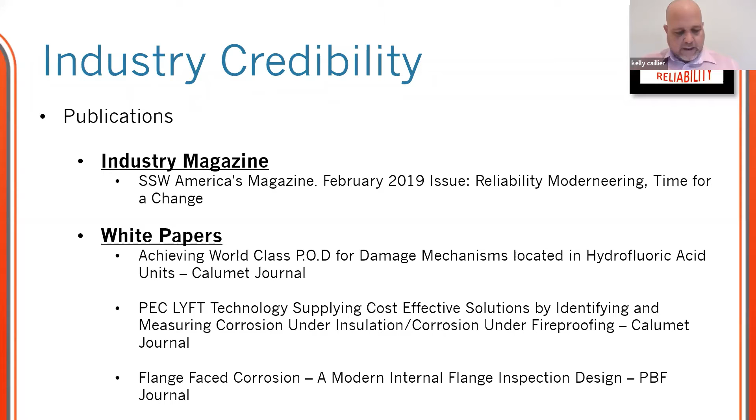So I'm not going to stay on this. This is my 26th year in this field, in 5 countries, highly certified. I'm not going to stay on that. I have been published in magazines, white papers throughout the country. So I just want to kind of throw it out there, because you might think, who is this guy to speak on this topic? So I've been around a little while.

Jared knows this story. Kayla knows this story, but I want to share with everyone. This is kind of the why of what I designed and what I'm going to show you. In 2011, something happened in a refinery in South Texas. There was a guy that I got very, very close to, we would meet at the coffee pot every day after our safety meeting. He loved baseball. I love baseball. He had a 5-year-old son that was just getting into t-ball, and he was their coach. And he was so excited that day to share with me these practice plans that he had come up with for his t-ball team, 5-year-olds.

And I said, man, you understand that, look, you're going to probably have your son and maybe one other person that's going to be really good. And you're going to have to stop people from picking flowers. So your practice plans, I said, man, tell me how that goes tomorrow. And we laughed, and he went in the plant and I went in the plant. And about an hour later, I heard a boom. It sounded like a shotgun, and I said, we're in South Texas, maybe it's just part of the atmosphere.

And when we were leaving that afternoon, we found out that my friend never made it to coach his t-ball team, and his son and his wife lost a husband that day. And the root cause of the accident ended up being a chemical injection point, which is a high consequence, high probability of failure item inside of a refinery.

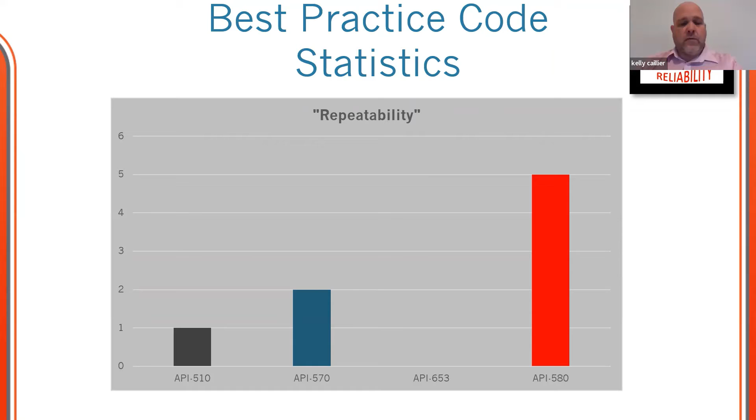So when we have codes dictating - and I'm not against the codes, I'm just for improvement in the codes. I'm certified to all these codes, and there's an improvement opportunity in these codes to say, hey, let's start to document and measure repeatability just a little bit better. I wanted to show this, these are the codes that are dictating, regulating our industry. Quite astounding, actually, when I scrubbed these codes and found not many instances of talk about repeatability.

So after studying - and the European Commission is saying the same thing - after studying with Lloyd's and the Chemical Safety Board and all these other teams, the lack of understanding damage mechanisms, how failure modes, I guess we can call it - whatever kind of industry, there's ways that things fail. How do you inspect for those? How do you mitigate those? You first have to understand how they fail. In this industry at least, the lack of understanding how things failed, and the lack of understanding how to actually mitigate them, was the major contributor to most of the most catastrophic failures ever seen in this world.

The lack of what I call a concurrent engineering process, where this guy here and this lady here knew what was happening, they were actually communicating, and everybody in this circle were able to exchange information. They had knowledge exchange campaigns in place. When a damage mechanism was manifesting outside of its integrity operating window, the whole group knew what was going on. Communication is a big problem in our industry, and when something happens, it's never communicated. That was a root cause of some of these catastrophic failures, and the neglect of a repeatability, much less reproducibility program in place, is just front and center.

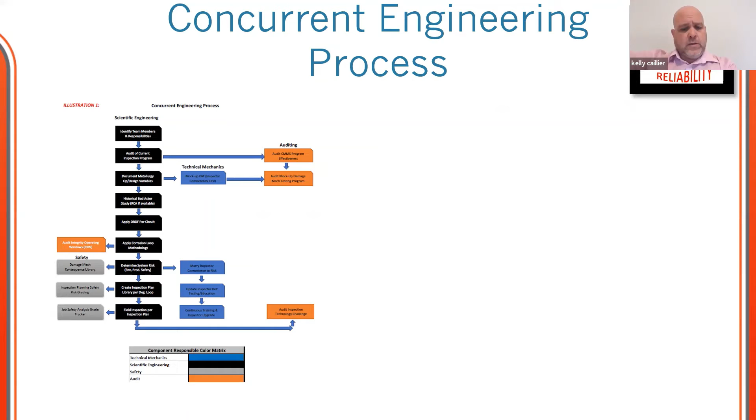And then there's an audit system, because this whole piece is an audit system. And there's a lot of responsibility when it comes to auditing something. We're trying to provide a closed loop, auditable, measurable system that allows for reliability growth. It really all starts with the quality piece, and you'll see elements that contribute to the quality, and elements that we need to measure for reliability as well.

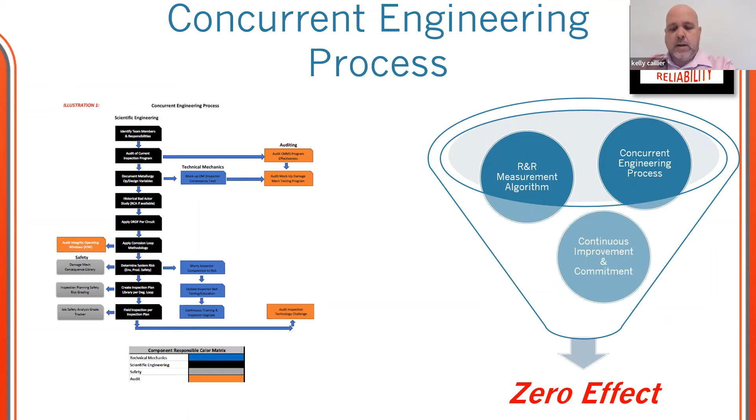And then what we're trying to do is eliminate - it's a strong word because it's very difficult, because there are so many factors that come into play - but due to mechanical integrity, which are factors that we can control, we're going to eliminate medium to high risk failures. And we'll know about them before they actually fail. We're doing a pretty good job of that now.

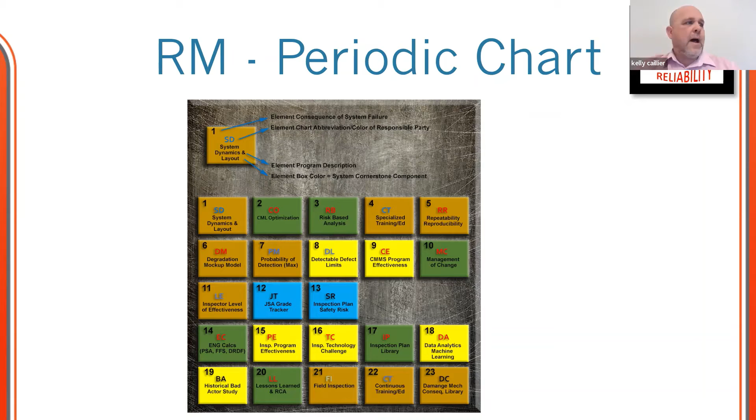So here's the periodic chart. There's a whole fabric built into a software program for this, that has a whole audit system on the backside. And the system is built to programmatically find the actual element that affects the highest change that can be made at a certain period of time.

So if CML optimization number 2 is the highest contributor to raising the level of effectiveness in your program, in your facility, in your site, in your objective, it's going to programmatically shoot that out. And then what happens is there are many other elements that are actually part of it. So CML optimization can actually have an effect on 5 different elements, raising the level of effectiveness in 5 other elements, therefore raising your overall effectiveness.

By concentrating on one element, your overall effectiveness can go up 10 to 15%. So what happens a lot of times - and I was just talking to a guy from Exxon here recently - is that whenever we pay attention to certain elements, like in your periodic chart, other elements don't get the deserved attention, and then those start to fall out. So we measure that too, and we want to make sure that the progress we've made keeps moving forward.

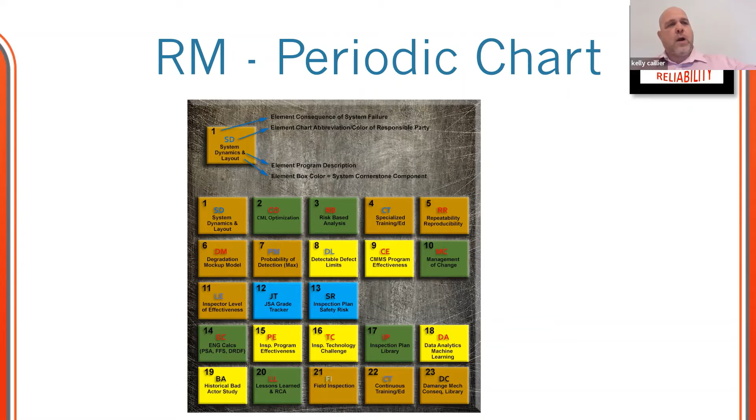So you can see element 5.

One thing I want to show you is that the periodic chart within the software program is weighted due to system risk. Everything on the top layer of the periodic chart has 100% weight. Any of these elements are critical to overall success of the reliability monitoring system. And as you move down, it's 80% system rank, 60% system rank, and then 20% system rank.

What's funny is field inspection is way down, weighted at 20%. People are like, well, field inspection is so important, why would it be at the bottom of your periodic chart? Everything on this chart is important, every single bit of it. But for field inspection to be a contributor to overall improvement and for us to make proper predictions for future equipment, a lot of things have to happen at a high level before field inspection can even be a contributor to that. That's what we've built here.

So the whole measurement system comes out, and I'll show you in the lessons learned, we were very hard-headed. There are some lessons learned at the end where I really, and our team really, needed to listen to our clients. We had this static fabric built software with these elements, gauges throughout, measuring how effective you are, but we built this fabric to just be static. We thought, this is the way we see it, and this is the way everybody needs to see it, and they need to conform to us. Well, quickly you find out that that's wrong.

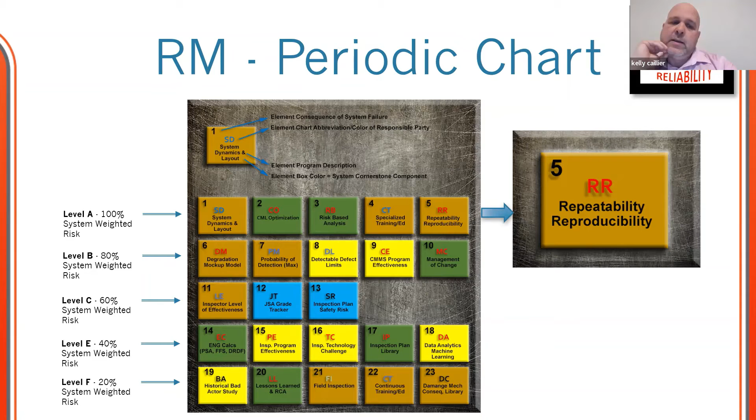What we've allowed is the system weight, this top line needs to be there, and everybody we've talked to so far agrees with us. What happens between element 6 and 23 sometimes can be scrambled around depending on what the client's trying to accomplish, their maturity and their mechanical integrity campaign and journey. So they're allowed to actually move these elements around, and then it recalculates how it affects the entire program. That's something new we're working on right now. It's in development. It's something I kind of saw coming, but I didn't think was going to be a thing, and I needed to probably listen to myself and other people, and I didn't, but I learned.

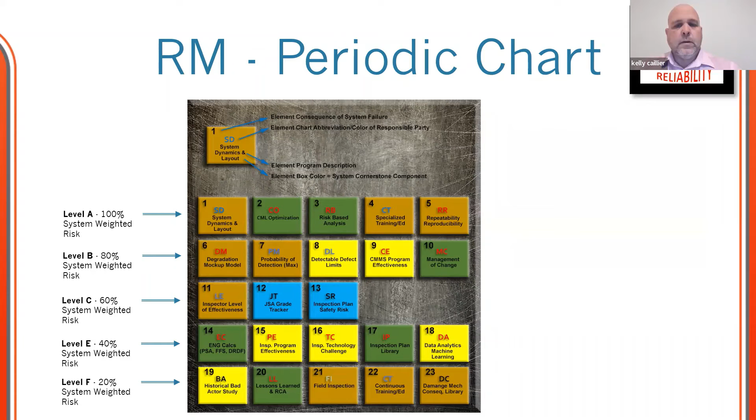I'm going to get through this. I want to show you back in the proof of concept stage, a couple years ago to about a year ago. There were 3 refineries that we studied. The first one, you can kind of see the table. This is raw data of the process effectiveness, and you'll see element number 1, system dynamics and layout. This refinery was 83% effective, and so on and so forth. You can start to really see how this program laid out here.

Before, as I was dealing with this refinery, and there's a caveat to this, I want to make sure you know this refinery no longer exists. And it no longer exists not because they shut down, it's because they had to. In this very unit that we studied, this hydrofluoric acid unit...

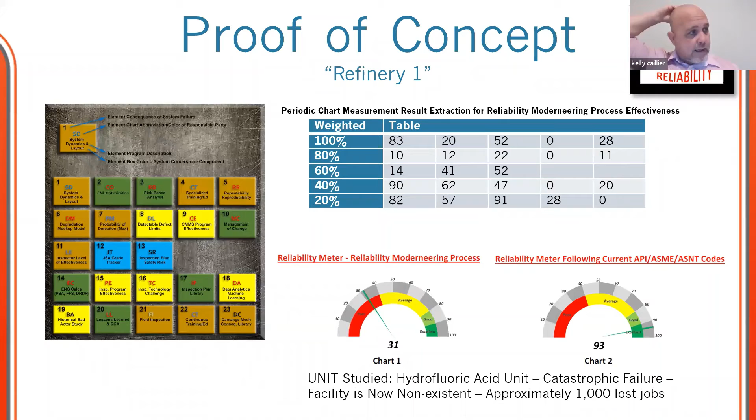Just a brief understanding of hydrofluoric acid: when it fails, it makes a vapor cloud. There were explosions everywhere, and it took over a little small city. It's about a 10 to 15 mile vapor cloud that comes out. This refinery no longer exists. But I did this study before it happened, probably about 6 months before this thing happened.

Long story short, I only had this table here, this 31% table. I didn't have this table here. This is another lesson learned I wanted to share, just because I was hard-headed again. So I went in there and we did a study, and it was 31% effective. And that's what I came out to.

The guy said, man, thank you so much for spending time with us, we really enjoyed what we learned from this study, and we'll get back in touch with you. Well, they didn't get back in touch with me. Then there was an explosion, and the guy ended up speaking to me, and he said, hey, look, I just wanted to tell you what you designed was brilliant.

But if you honestly thought I was going to bring 31% effective to my boss, you lost your mind. And he said, I don't know what you need to do, but you need to do something that can contribute to us actually installing this kind of program, because it's needed, but it can't make the client wrong.

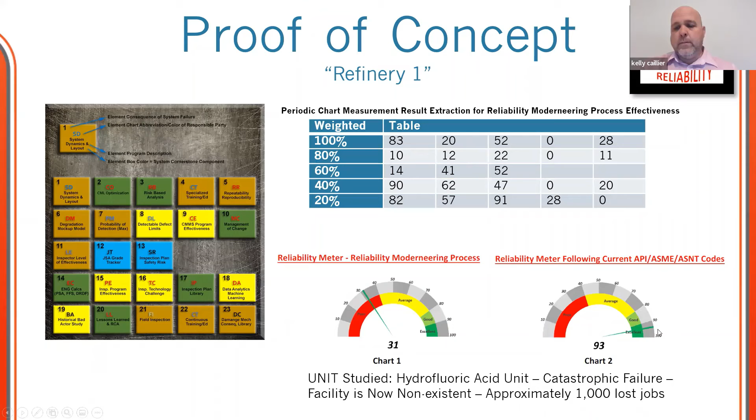And so I thought about it, and what ended up happening, because of the data that we had collected, we built a chart, or measurement system, that said, okay, those codes I showed you at the beginning of the presentation, how well are they following the minimal standards of the jurisdictional codes? How well are they doing that?

And so we started to study that, and it's like, man, they're doing really, really good at following those codes. But there's opportunity, obviously, for these things to be measured differently. Because we're not just talking about inspection now, we're talking about communication, quality, all the way to reliability, training, understanding, and everything that's involved in running a plant and keeping a plant actually up and running and not failing.

So we found out quickly, 93%, they were effective. They were just about as excellent as you can be following jurisdictional codes and the minimum standards set in there. And so I called him back and we talked about it. And he said, if you had come with that, we wouldn't have eliminated that failure. Those failure modes were too far gone.

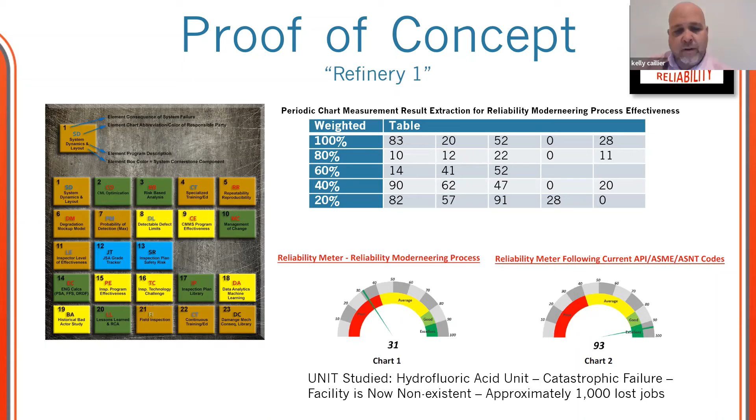But this is something for the future that you might want to think about, to be a partner with the client and not making them wrong and you right. So I learned that. You have to be humble a little bit.

Refinery number 2, kind of the same. This one, only one unit was studied. It was an FCC unit that previously had 12 days of unplanned downtime in the previous 6 months. Business interruption alone was 18 million. It was a pressure vessel failure, and it was due to mechanical integrity. Very catchable, could have eliminated it, could have brought it down before the failure, but didn't.

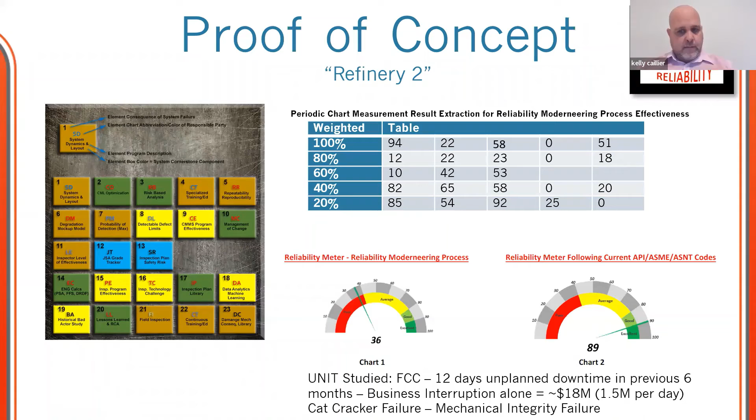And you can see again, 89% effective following the jurisdictional codes and the minimum standards, 36% effective. And this is only one small unit. This is not the rest of the units in a very large plant, this one here. And once again, same thing.

This was a crude unit studied, and this is all proof of concept because I'm trying to make myself wrong now. So I've gotten into this piece where, hey, people are doing the right thing. These all have to be one-offs. So I have to be wrong. And same thing. Crude unit, 26 days of unplanned downtime in the previous 12 months, $17 million of business interruption, and these were due to piping and exchanger failures.

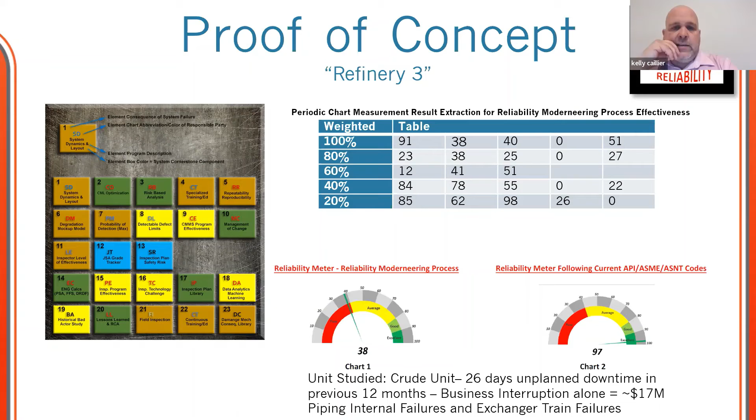And all of these programs have been in place for many years of trying to predict failure. And obviously some things are going wrong. And so after this last proof of concept, we moved into actually implementing. And it's being implemented right now into a refinery as we speak. And a new one's fixing to kick off here pretty soon.

But the lessons I learned, and I wanted to share these because I'm sure anybody can chime in: be open to client objectives. I was stubborn. I designed this thing and it was my baby and I wasn't changing it. And quickly the industry slapped me in the face and said, no, you're going to change. We like it, but you're going to change it.

And I didn't change the integrity. The integrity and the foundation is still there. I'm not going to twist over and devalue the integrity that's built in here and what the system contributes. At the same time, it's what is the client trying to accomplish, and how well can we take what we built and put it into a system like this and actually measure it.

And if you're thinking this is just oil and gas, we're actually going into underground infrastructure and building a system like this. There's one in manufacturing building a system like this. So there's opportunities that exist all over the field and all over the place.

And we're looking at the medical field right now, pretty hot and heavy, to implement a system like this. Different elements, but the same kind of measurement tool. So there's opportunity for this to happen everywhere.

We added element 18 here recently, and we're working with a company that uses machine learning and AI to predict failure mechanisms. And we tap into operational data from a non-human side. And we're just looking to make this whole system impervious to human corruption, because again, humans will be humans, and we just try to protect ourselves, but that doesn't lead to continuous improvement.

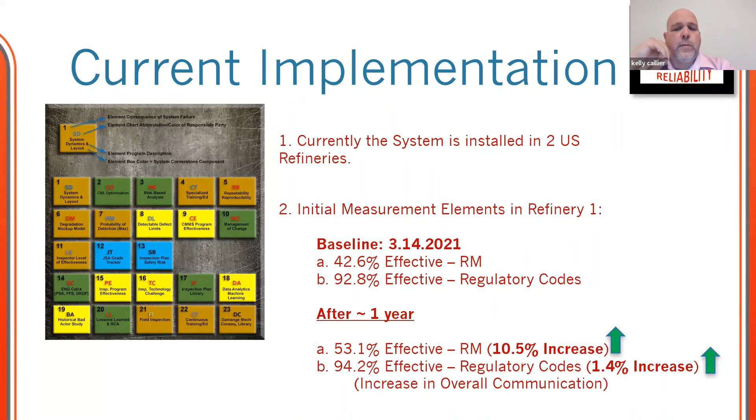Kind of a current focus and ROI and where we want to move to is we started talking to facility insurers, and insurance rates have gone through the roof in the last few years significantly. And risk-based programs that were actually installed in a lot of these facilities didn't produce what the insurers thought they were going to produce because they can be manipulated so bad. And so what they did is they backed out from any discounts that they were receiving in a lot of these, especially refineries.

And so we're kind of coming in as the middleman from the owner user to the facility and being that liaison between both of those, where the facility can actually understand their risk and how to mitigate it, and the owner user mitigate their risk, and the facility insurers start to gain confidence again that a third party group is actually measuring this system without bias. And COVID kind of slowed down those talks, but now those talks are really starting to fire up again.

So this whole system is about building confidence and eliminating failure. It's what it comes down to, and how you measure that. There's a great responsibility in that measurement system. And so we're constantly improving that measurement system. And where it started 5 years ago to now, it's light years away. So I just wanted to share some of the progress that we've made.